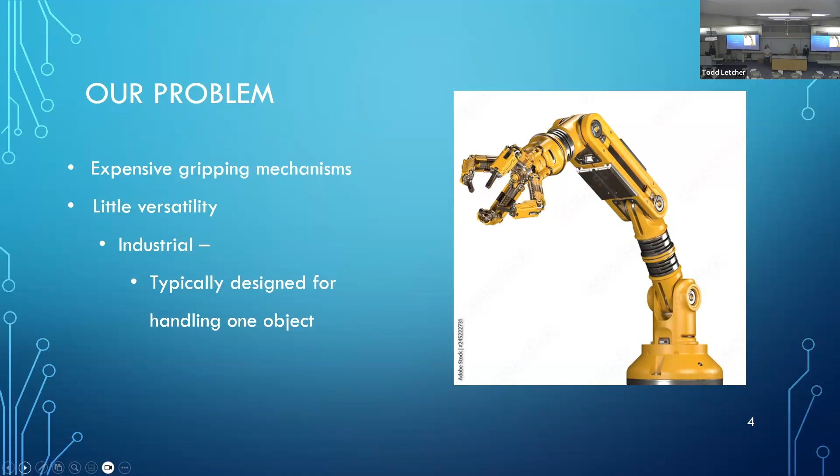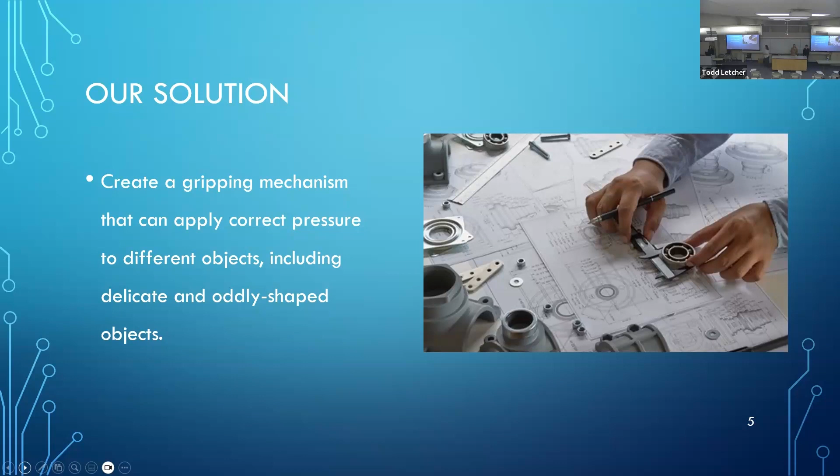Our solution to this problem is to create a gripping mechanism that can apply the correct pressure relative to different objects, including delicate and oddly shaped objects.

Some of our main goals are to use portable and easily accessible parts. In our design, we use 3D printed parts because 3D printed filament and 3D printers are pretty easily accessible to anyone, anywhere. We'll use that within our design to effectively pick up small and delicate objects like chips, or other objects such as screwdrivers and other tools.

We also want our device to be useful in several different applications. Some of our objectives are to maximize the grasper's use in different mechanisms in different fields, such as the medical field or manufacturing, maximize the range of objects that are controlled, and minimize human involvement in the grasper with electronic controls.

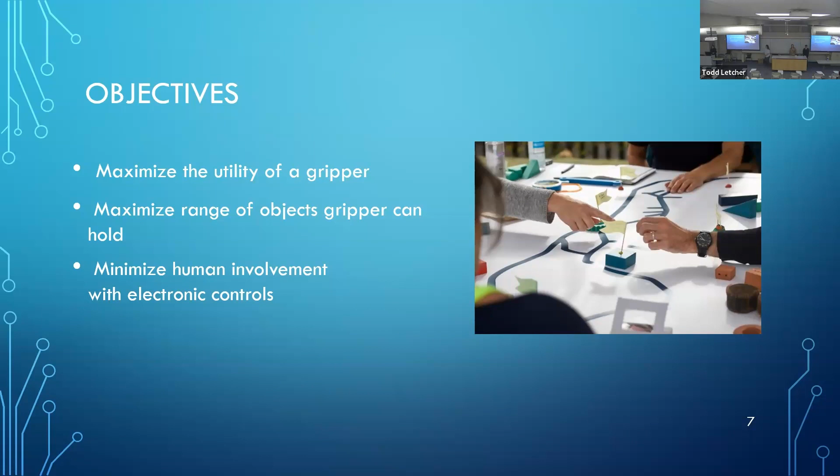Before we began designing our project, we had to first investigate what was out there currently on the market. We came across three that we want to present.

Starting on the left, there is an origami inspired grasper developed by NC State University, recently published in August. It can be attached to a robotic pincher, which pulls apart two strings on the left and right, closing the tendril-like structure in the middle. It creates a cage around whatever it's grabbing, and can grab things as heavy as 14 pounds or as precise as a single strand of human hair.

In the middle, the Robotiq 3-finger gripper. We took a lot of inspiration from this in our design, which you'll see later in the presentation. It's an open source model, so we were able to look at how they designed it, since they provide their 3D CAD model online as well as their electrical code and how they run it.

On the far right, a prosthetic hand from Vincent Systems, their 4th generation. A lot of prosthetic hands like this one run with myoelectric sensors, which detect the electrical activity from your muscles when you contract your hand, so the prosthetic hand can move based on the sensations picked up by the sensors.

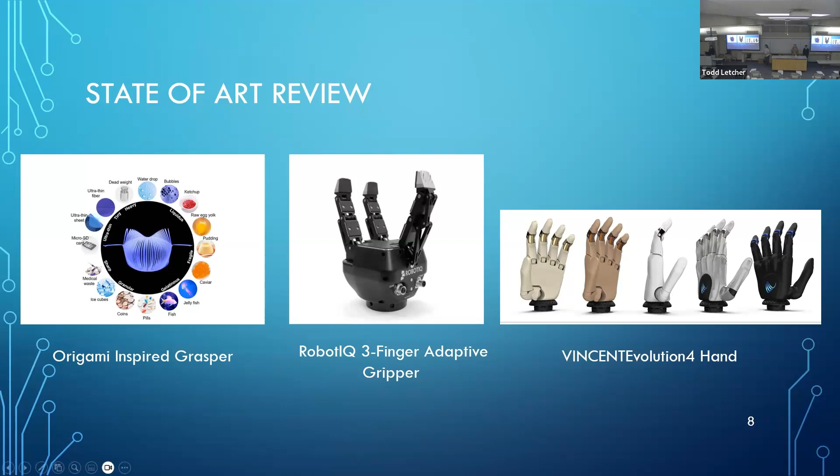These are some of our design decision matrices, which help us choose between different options. Each column is a separate choice we would have, and the rows define things we want them to meet, each with a rating from 1 to 5, 5 being better.

We ran a test for the mechanism we wanted to use for our hand, with options including a gear system, a string tendon-like system, a linkage system, or a pneumatic or hydraulic system. Overall, the string system ended up winning, mainly because our manipulation ease and fabrication time were more feasible for this project.

Alongside the mechanism, we had to figure out how we were going to manipulate our grasper. Our three categories were manual, cable, and electric. Manual would be us manipulating it with our own hand. A cable apparatus would span your upper arm, attaching to your shoulder or elbow, with the grasper moving based on movements of your shoulder or elbow. Electric would use motors, Arduino, and code to eventually limit human interaction with the grasper.

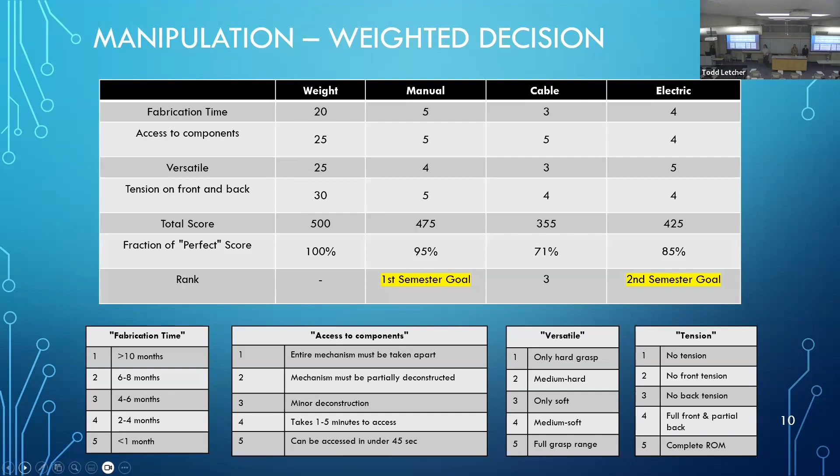We had to decide how many fingers or digits we wanted on each hand. Overall, 5 fingers ended up winning. However, we really want to get that grasping capability down first, so we're going to stick to 3 so we can get the fingers and thumb working correctly, and then add more fingers later on.

So this is our final design CAD model. It is a 3-finger, 3-joint mechanism, kind of shaped like a human hand. It uses a string system with tendons and an elastic band running along the back side of the hand. This back tension allows it to open automatically. And then we plan to put silicone fingertip inserts in. Right now, they're just shaped to put on the end of the fingertips.

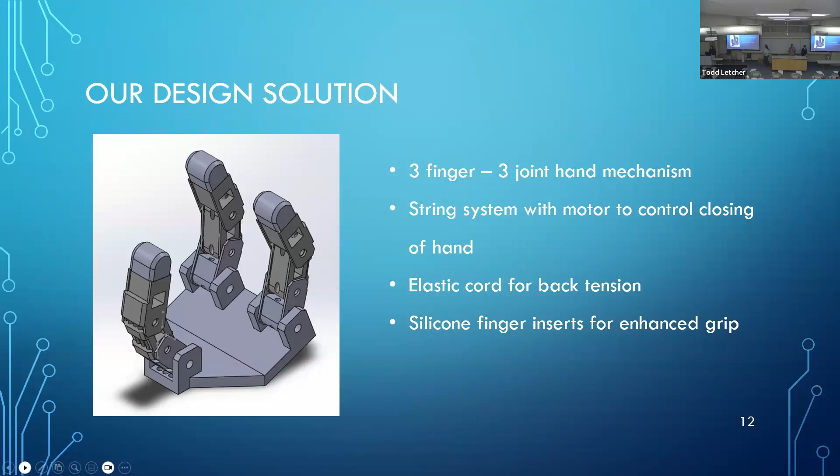So going into how our string mechanism works, we decided to go with fishing line to represent the flexors of our hands that run along the inside of your fingers on your palm. The way it works is we have the fishing line strung through the channels that James talked about in the previous slide, and in the fingertip, in that rectangle, there's an anchor.

So when you pull down on the string, the finger moves in a sequential movement, kind of like your finger would normally - it moves from the fingertip to the intermediate knuckle to the base. As you can see in the bottom figure, that depicts what it looks like curling after pulling the fishing line.

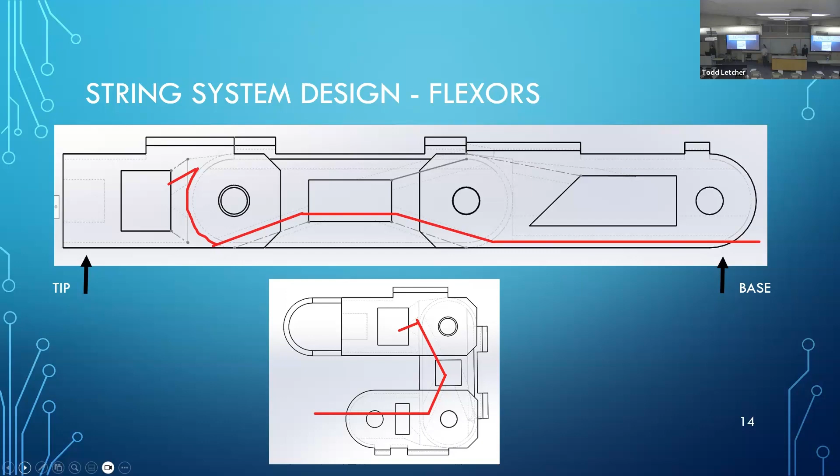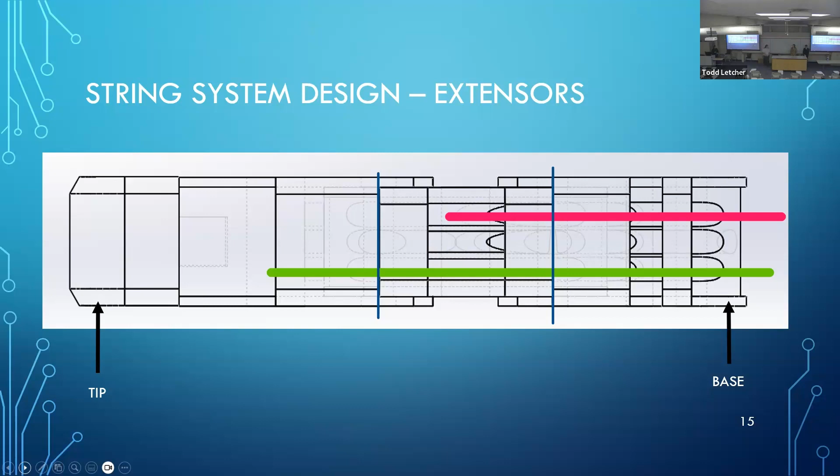On the back side of the hand, we have the extensors, which are the elastic string we're using. These extensors keep the grasper at rest, open, and then when force is applied to the flexors it will close, and as soon as force is removed it'll spring back open. So these elastic strings work as antagonistic muscle pairs, like what you typically have.

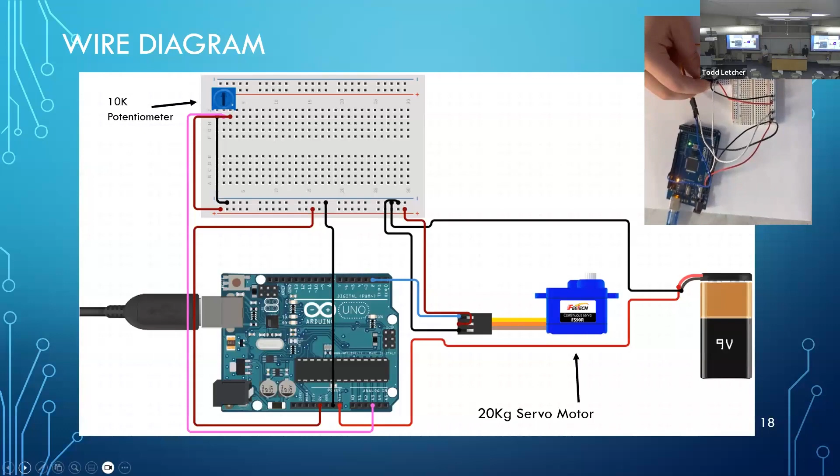During the semester, we developed 2 prototypes and underwent testing to test the grasp of each. We placed 2 Tupperwares 12 inches apart, one filled with Cheetos, one empty, and determined how many we could pick up with each prototype.

Our first prototype is on the left, and it worked more or less like chopsticks, so we were only able to pick up maybe 1 or 2 chips at a time. The reason was the fingers were too long in respect to the palm. Our first fingers were about 7 inches long, so we decided to shorten them and add a bit of a bent palm to get a more rounded grasp.

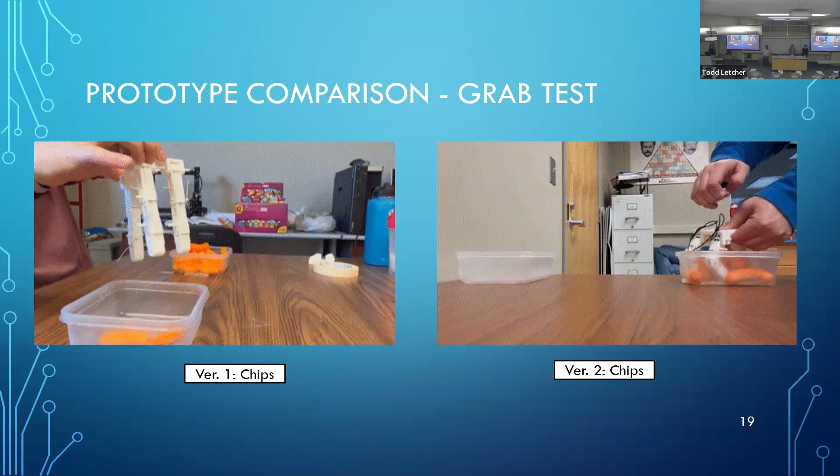Our second prototype fingers were about 3.5 inches, and the bend in the palm was about 30 degrees. So we were able to pick up about 4 or 5 Cheetos instead, with a more rounded grasp.

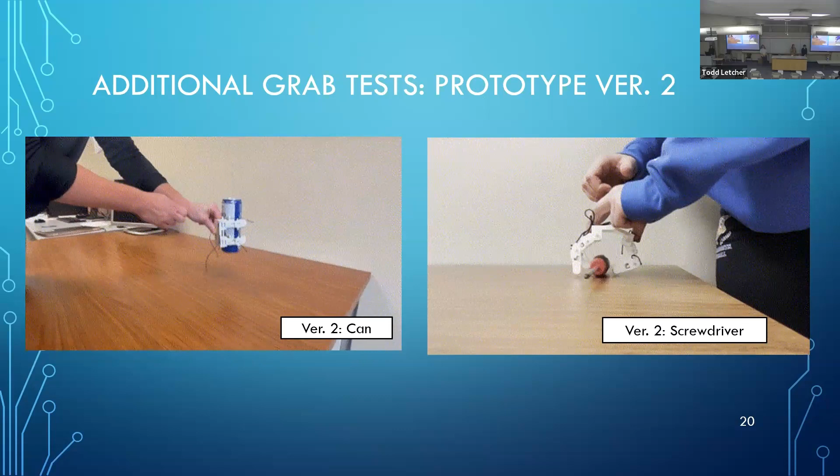Again, with the testing, these are just different grab tests. On the far right, picking up a screwdriver, fully showing the round grasp from the side view. The thumb was able to get fully tucked underneath the screwdriver, whereas before the thumb wasn't even able to get underneath it.

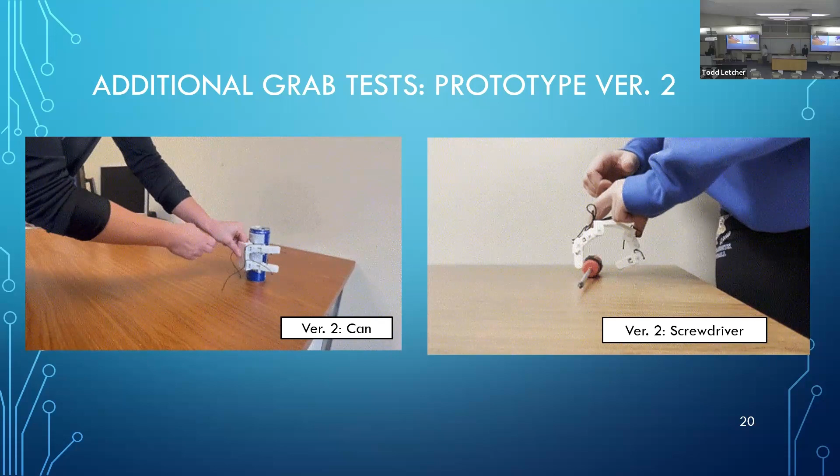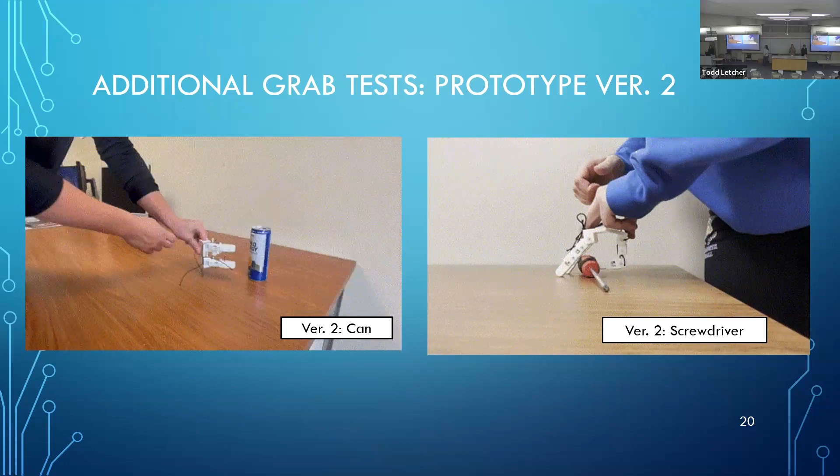On the left, this is edge can, showing vertically displacing something where the hand isn't supporting it. You can see that the grasp is tight enough so the can isn't being displaced due to gravity.

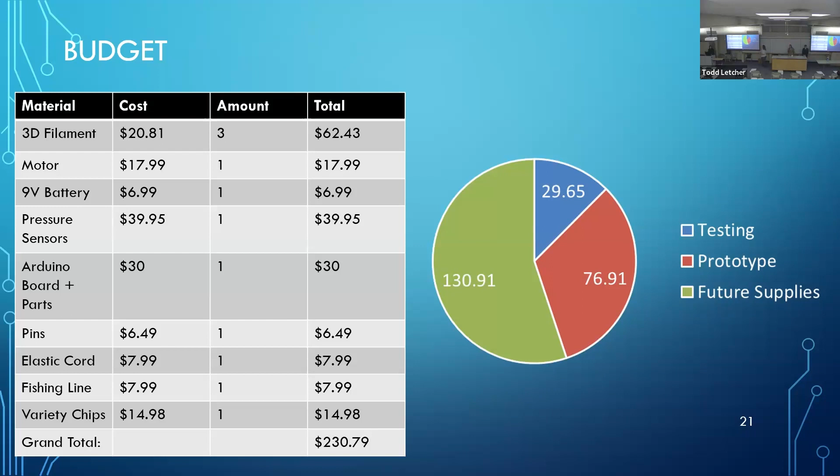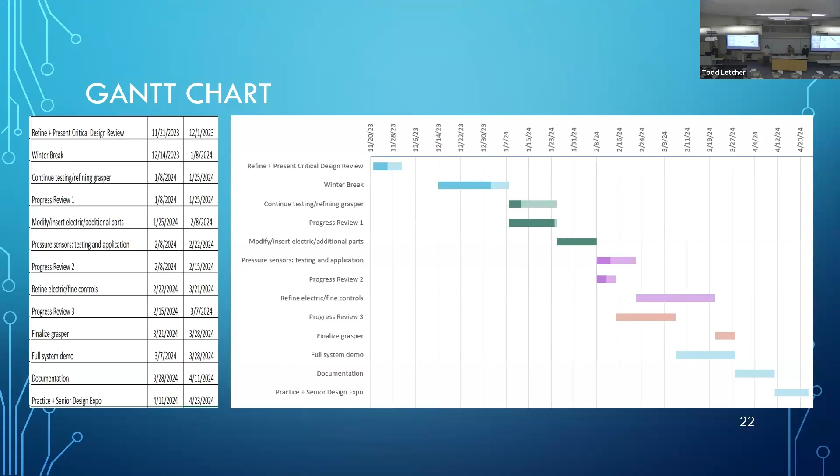After that, we'll work on refining that and practicing it for eventually our senior design expo. With that, we invite you to ask any questions you might have.

Question: Do you think you might have any cable slippage or tangling when you do cyclic testing next semester? Answer: We're hoping to avoid that, but we have thought about it and are taking it into consideration, or just splitting it around here.

Question: Are you guys planning to look into, if you're trying to pick up something really delicate and clamp too hard and it breaks, looking into that at all? Answer: Yeah, so we're going to add pressure sensors in second semester. We're looking into adding those to help with sensing how much pressure you're using against the object, to avoid that.

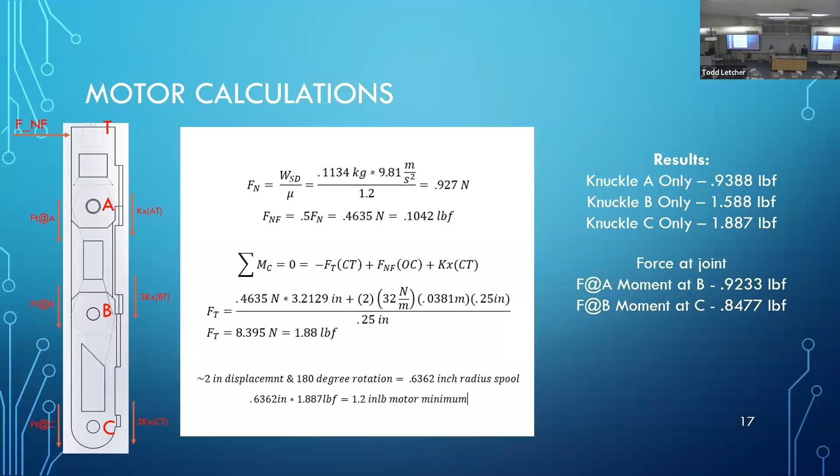Question about what the sensors look like: They're like a silicone fingertip that we can add on to the top of our design. It'll replace this instead of a 3D printed piece — it'll be silicone. Question: Is that a sensor that somebody makes for the fingertip application? Answer: Yes.

Question: How much weight would you like it to pick up? Answer: Max load, I think we're shooting for 8 pounds. As of right now, we are at 3 pounds.

Question: What's the restriction — what breaks before you get higher than 3 pounds? Answer: It's just that the grasp isn't able — we were able to hold the weight and grasp it, but when picking it up from the table, the fingers began to unravel. So it's about figuring out the amount of tension we need in the fishing lines for a secure grasp that can pull it up without unraveling. The fishing line is pretty skinny, so it's hard to pull it tight without it hurting your fingers — your fingers start to hurt before you can reach the tension needed. That's also a design issue we need to figure out.

Do you have time for one last question?